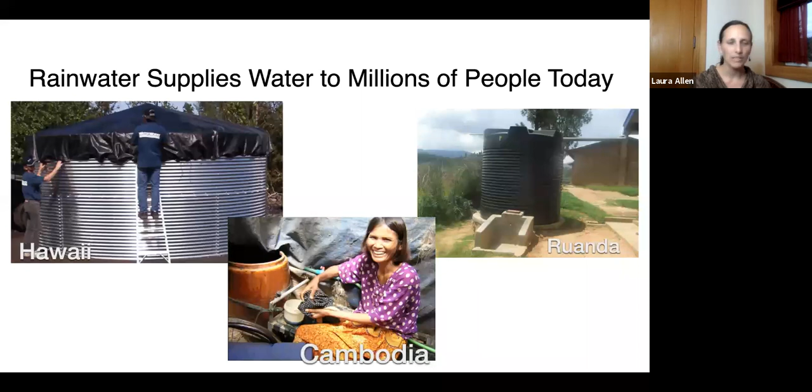Texas has a lot of rainwater-only water supply. San Juan Islands, there's these kind of spatterings of communities around the United States. But also, in many places, the rain is completely ignored and shunted away.

So tonight we're going to talk about benefits of rainwater, which is going to be incorporated into everything we discuss. It's an obvious way to replace water coming from your municipal supply with an on-site water source, basically this free, clean water falling from the sky that we can harvest and put to beneficial use. We're also going to talk about stormwater, which is a huge problem in our cities and towns and world, and how we can turn that from a problem into a solution.

We'll talk about rain gardens, which are ways to collect rain in the ground. We'll talk about catchment, so tanks, ways we can store the rain, and talk about these different components and design considerations.

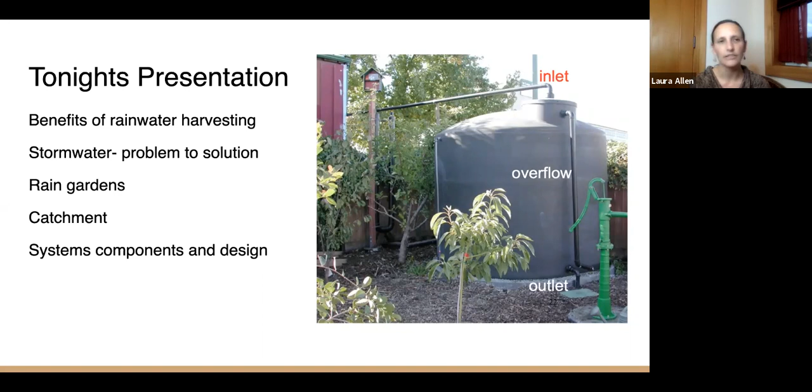Before we get started on rainwater, I just want to contextualize it as one tool in the toolbox of how to have more on-site water and rely less on our municipal supplies.

So we have rainwater and stormwater, two water supplies we'll talk about tonight. There's also greywater, which is water you've already used in your home. There was a webinar on this just a little while ago, and it's recorded, so you can watch that if you missed it. Greywater comes from showers, sinks, and washing machines.

Black water is combined wastewater from a home, and it's typically not used at the residential scale, though it is in some places and on a larger scale. And then some places have what's called mechanical water.

So rainwater is a piece of this, and it's a really important water source, especially in our wet climate. Even though we're in a Mediterranean climate, which means we have a big dry season, we get a lot of rain when it does rain, which is a lot more than some of our neighbors to the south, like California.

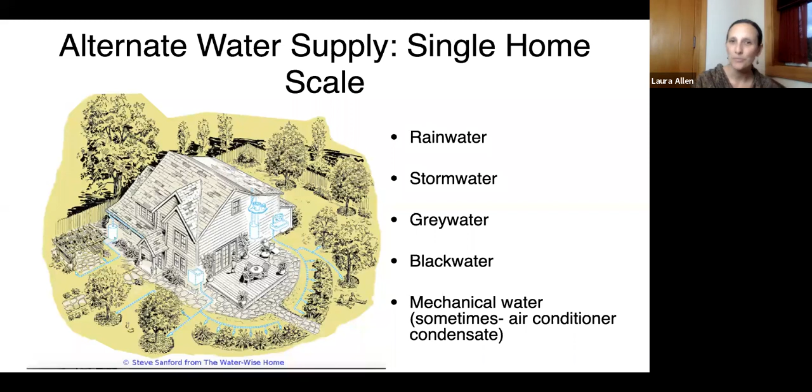When it rains, some people think, oh no, it's raining, I've got to get my umbrella or my raincoat, and it's kind of this annoying thing. Other people are super excited about it.

Historically, rain operated really differently in our communities and cities, before we developed our cities—places that have lots of buildings, roofs, and roads, a lot of hardscape. Hardscape is built substances that rainwater doesn't soak into.

Before that was developed, our landscapes infiltrated water—a lot of water infiltrated into the ground. So there wasn't a lot of runoff, much less flooding and localized flooding conditions. And the water that ran off was pretty clean because it was cleaned through this healthy landscape.

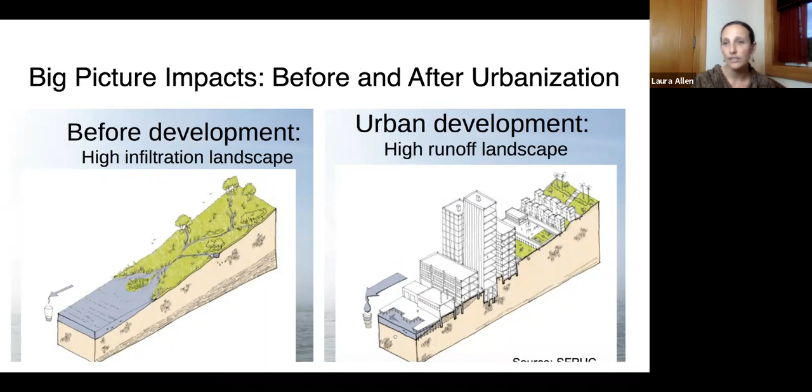But after urban development, the way we built our cities, rainwater flushes over our cities and picks up a lot of pollution, and a lot of it leaves our landscapes. This is causing a lot of challenges and problems for our environment, as well as for life in our cities.

So it causes a lot of problems for all the living things in our streams. It also causes problems for the structure of our streams, lots of erosion, cutting of banks, flooding. By building our cities, we've caused a lot of problems downstream that us living in our homes might not even be aware of, that all that rain running off our driveway is causing these problems.

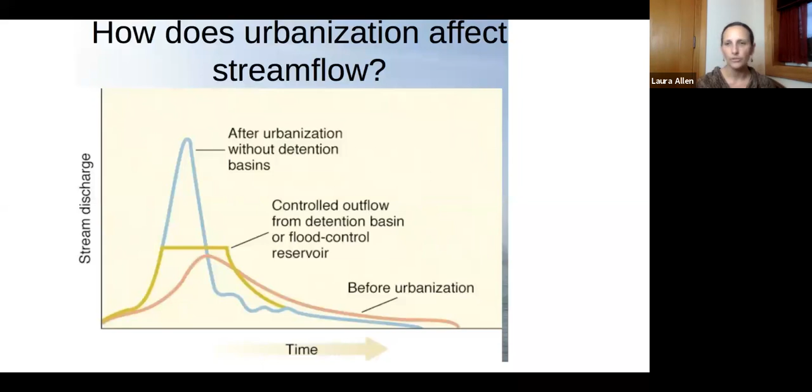So just some terminology before we get started. Rainwater is kind of obvious, it's the rain that comes down. When we're talking about using rainwater, we mean it's landed on the roof and we've collected it before it got to the ground. That's a rainwater catchment system.

Stormwater, this is also rainwater. When it rains, the rain comes down, but once it lands on the surface of the ground, we now call it stormwater. It's regulated a little differently, and what you could find in it is different because now it's washing over our streets and has a different quality than rainwater does. So when I talk about rainwater, I might mean any water coming from the sky, but when we talk about a rainwater system, it's collecting it before it hits the ground. When we talk about stormwater, we're talking about managing that rainwater after it's gotten onto the ground. I hope that makes sense.

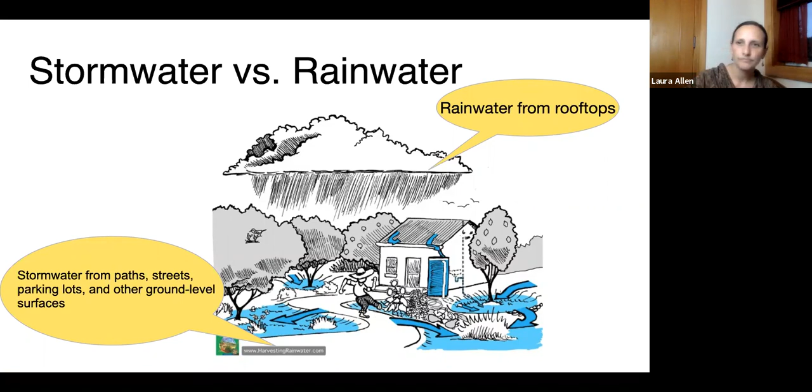Stormwater is a source of a lot of pollution. Our cities have lots of things on them that are unhealthy for the environment. There's dog poop, herbicides, pesticides, brake dust, oil slicks, trash on the surface. When it rains, all that gets flushed and washed away, goes straight down our storm drains, and usually is directly discharged into a waterway. A creek connects to rivers and bays and oceans. That's how a lot of pollution gets out into the environment, through our stormwater system, the system we've designed to get rainwater away from our homes and streets so we don't have flooding.

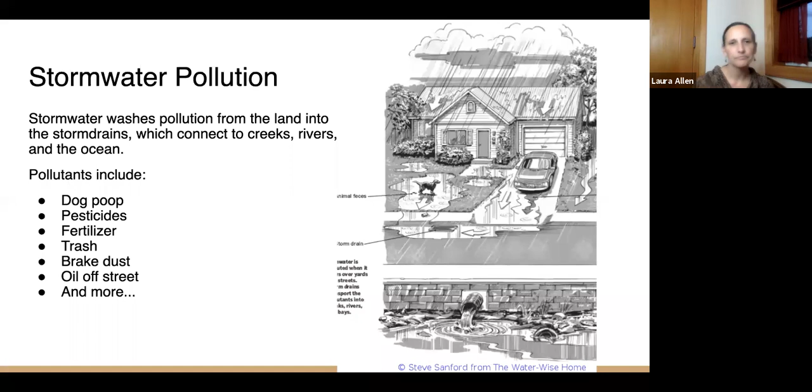We don't want this rainwater to become this big problem. There's a lot of things we can do, and some of them are very, very simple.

Just thinking about what kind of materials do we want to use around our home. If we want a path, do we have to have a cement path? Could it be a wood chip path instead? Wood chips will soak the water down into the ground and the water won't run off, whereas a cement path, the water can't soak into it and it will run off of that landscape.

Having a lot of plants, deep-rooted plants, a lot of native plants, those are really good at opening soil and increasing infiltration in your landscape. So you could have this beautiful, lovely landscape that's also soaking up rainwater and preventing pollution downstream. That's something really simple that doesn't take a lot of shifts, if you're at a decision-making point about what to put in your landscape. If your landscape's already constructed, then we need to make some changes to it.

I'm going to start by talking about passive water harvesting, or in-ground harvesting, where we take the rainwater as it comes off our roofs and streets and turns into stormwater, and we try to stop it from leaving our properties and soak it into the ground.

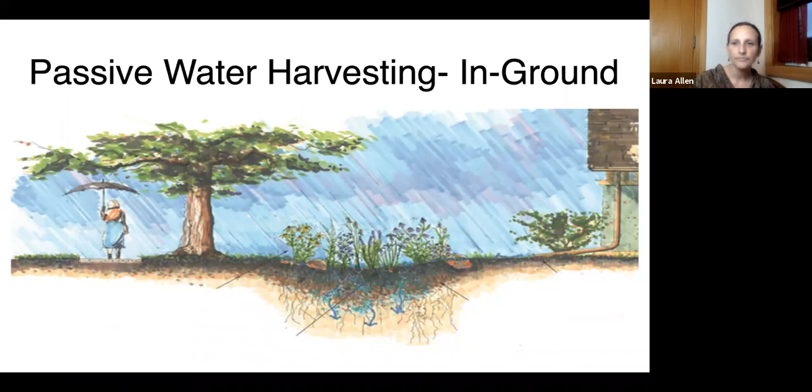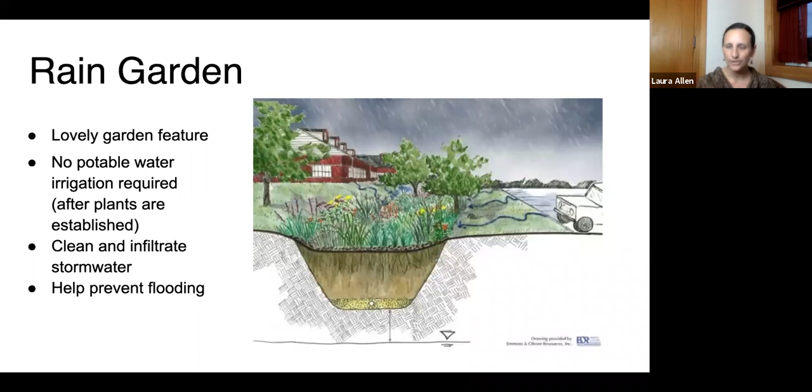A rain garden is a very lovely garden feature. You could think of it as just something beautiful to put in your landscape. Rain gardens also don't require potable water irrigation, so once established, you have a nice landscaped area you never have to water. They also clean and infiltrate stormwater and help prevent flooding, giving multi-benefits in our landscape—beautiful landscapes that also prevent flooding and clean water, benefiting our yard as well as our community's watersheds.

A bit more about the rain garden: how it works is you're directing water into it from something that can't soak in water—usually from your roof, your downspouts, where a lot of water comes off. It could also be from your driveway, or other hardscape, which you direct into your rain garden.

There are edges called berms to keep the water in, so you're creating this bowl and designing it so the water will pool up. You don't want it to pool too long, because then mosquitoes could breed, so it pools for about 24 hours and then soaks away. This gives a nice big space to collect a bunch of water at a time and slowly soak it down over a day or maybe two. That's basically what a rain garden is.

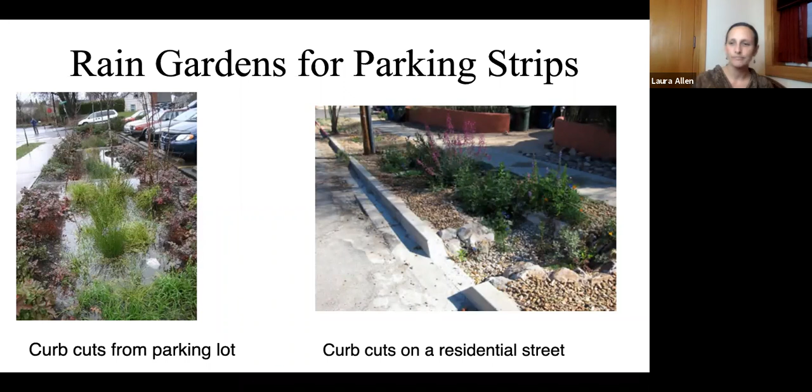The last thing I want to mention about stormwater is that it can be collected, cleaned, and then used for a non-potable, non-drinking need, like toilet flushing. These are usually only done at the commercial scale. There are examples all over the country where commercial or larger institutional sized buildings are collecting stormwater, filtering it, cleaning it, and using it for non-potable use.

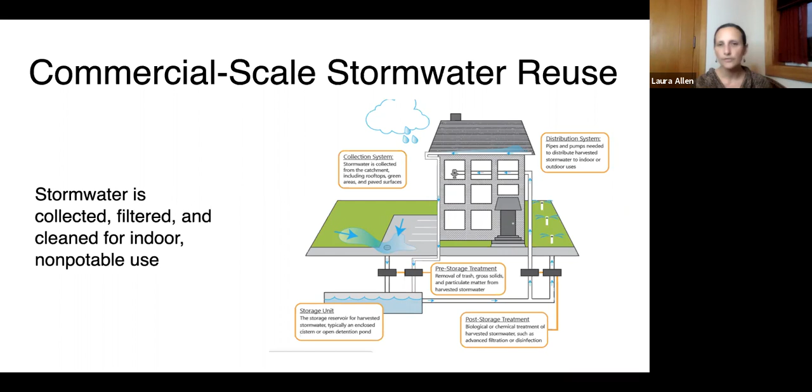So now I'm going to shift to talk about storing the water and using it for later. The thing about rainwater is there is a lot of it. If you have a roof like a house, you're going to be able to collect a bunch of water, but it's not always when you need it, especially if we're using it for irrigation, which is the easiest way to use rainwater—just store it and then simply irrigate the landscape, because you don't need any extra filtration or disinfection. It's pretty simple.

But the timing doesn't always match up, especially in our Mediterranean climates where we get all of our rain one part of the year and all of our irrigation need is a different part of the year. So we have to be managing that.

Another thing to keep in mind is when we are using rainwater in our homes, we can use these different approaches together. We can integrate how we are harvesting the water. So maybe from one of your gutters, your downspouts, you might send that water into a rain garden, like the picture on the front, and just flow and sink that water and have this lovely garden feature.

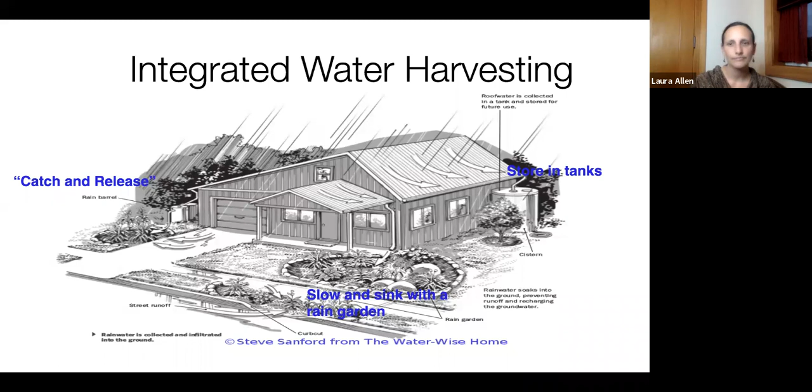Here's a picture showing different ways you can collect rainwater. You can see in just 1 inch of rain, you can collect about 600 gallons, so that really adds up quick. The simple rain barrel in the front, that's a single rain barrel. That's a small thing that usually any site has room for, and the cost is very low. It's very easy to put in, and it's a great reminder of how much water we have, how much potential we have, even though a rain barrel isn't really tapping into the scale of potential we have on our roofs.

A lot of times you can connect rain barrels together.

So on the lower part, under that deck in the back, you can see there are 8 rain barrels connected together—that's 400 gallons of storage. You can make rain barrels add up to a lot of storage, and they're really nice to use in dead spaces, like under decks or narrow areas behind buildings that are usually unused. They fit into these unused spaces and can connect together to increase capacity.

Then we have the tanks, the cylindrical circular tanks. You can see in the picture, toward the left side, there's a 3,000 gallon tank. Those are usually placed near the building—they're big, but not too big. In this home, they have an even bigger 10,000 gallon tank located away from the building. I'll talk about how you get water from the house into these various collection systems, but you can put the larger collection farther away so you don't have the visual impact of it.

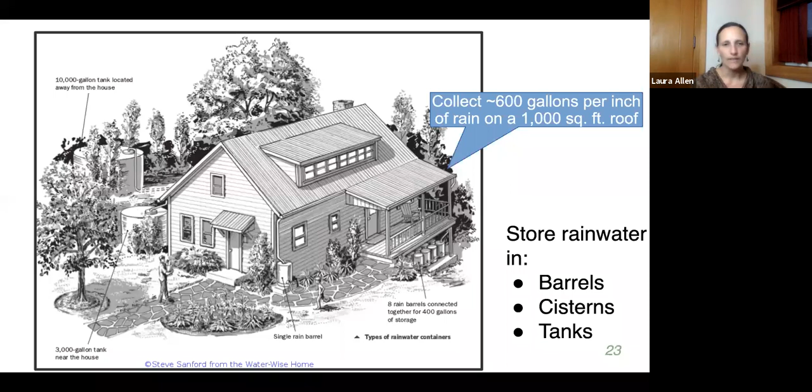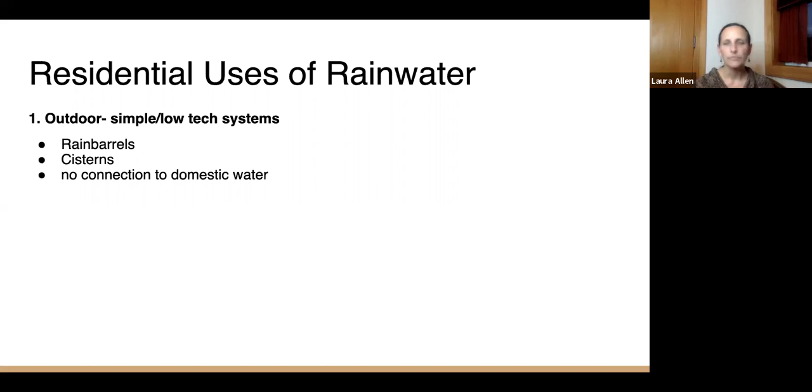We typically use residential rainwater in 3 main ways. The first is using the water outdoors in a really simple system—having a rain barrel, cistern, or tank (we use those words interchangeably) with no connection to the domestic water supply, just a separate system. We use a hose or a simple irrigation system to send the water outside. This is the most common way to use rainwater in our area.

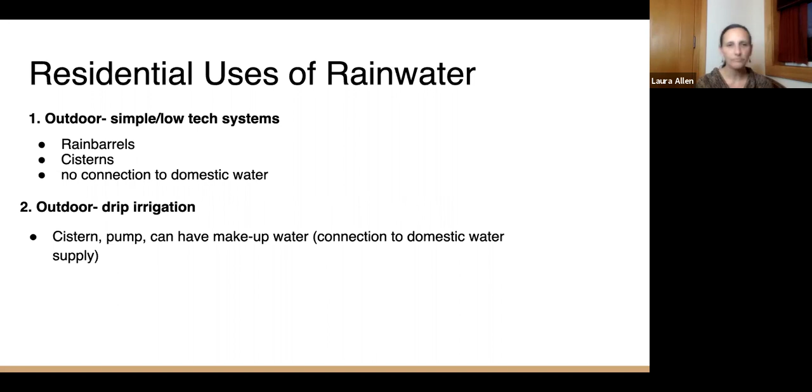The second way is also outdoors, but sending it into a drip irrigation system. You'll have a tank or cistern, and you might have a pump or not—there are zero-pressure components you can use. You can have a drip system that runs off the very low pressure a rainwater system has, or use a pump. In a more sophisticated system, you can connect it into the rest of your water supply in ways that protect the drinking water, so if you run out of rainwater, the system can switch over and finish the irrigation with the domestic water supply. That's another way. The third is sending the rainwater back inside the home, and these methods increase in complexity.

Inside our homes we have non-potable uses of water, like toilets and laundry. No one's drinking that water, so it could be lower quality, and rainwater can easily supply these—it's relatively clean with just a little filtration. It can technically or functionally go into these fixtures and appliances and be used instead. With extra filtration and disinfection, rainwater can be brought up to drinking water quality and supply the whole house's water use. The permits for that are a different story, but technically, yes, it can definitely do that. Whether you can get permission is a different question, and that really depends on the state and local jurisdiction.

Currently, I wouldn't say it's easy, but it's much easier to get an indoor system approved for non-potable uses than for potable use, barring examples like Hawaii, where there are no other water options. In places where there are other water options, it's pretty easy to use rainwater for toilet flushing or laundry, though the system will of course cost more. So most people just keep the water outside.

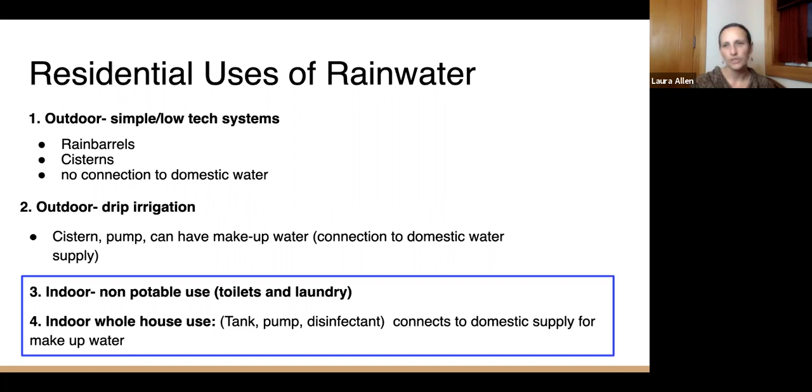I'm going to show you a few calculations you might want to do—consider this optional. If you have a house in an urban or suburban area, you'll be able to fill any size tank you feel comfortable putting in your yard. If you live in a rural place or have a bigger lot, you might want to calculate this to make sure you can fill it, especially if you're thinking about a 10,000 gallon tank, or if you're collecting off a very small roof, like a garden shed, or doing a project in a community garden where you don't have a building, just a shade structure or something.

I'm going to show you how to do this, but just know if you want to do rainwater and you're in a kind of urban or suburban home, you don't need to do this. You'll see why, because the answer is almost always yes, you can fill your tank, no problem.

So the first thing you do, step one, is find your roof's catchment area. The catchment area is the same as the footprint of your house. The slope or pitch of your roof doesn't impact this at all. You just need to know how wide the house is and how long it is, then multiply those two numbers together.

So in this example, this house is 80 feet long and 30 feet wide, so it's 2,400 square feet. Of course, your house might not be an exact rectangle. You might have little offshoots, so you might have to add a couple of calculations together to get your total area. Or if you're just doing a portion of your home, you can find the area of that section where the gutters go to one place.

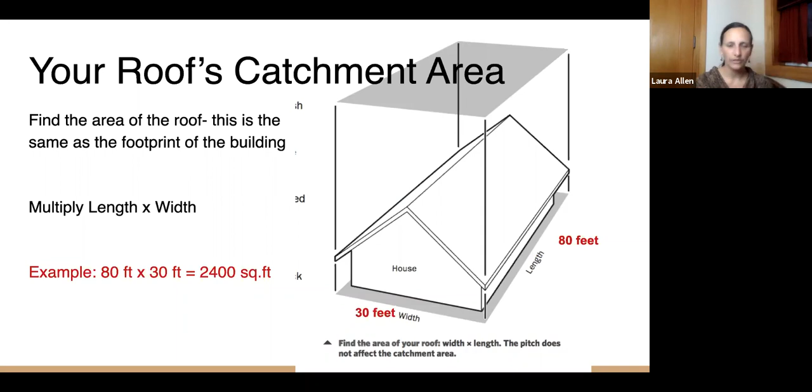So this is the area of the roof, the catchment surface, in this example. The next thing we need to do is calculate the potential rainwater potential. We start with our catchment area, and then we multiply it by rainfall.

We usually use average rainfall, but depending on your situation, you might want to use a dry year. If you were building a house and your only water supply was rainwater, you would not want to plan for average, because we know that many years we don't get the average rainfall. You'd want to plan for your worst case scenario drought year to size your system. But for us who have other water sources, we just use average rainfall because it tends to work.

So we have catchment area times rainfall, and then there's a coefficient that converts inches. We put our rainfall in inches, our catchment area in square feet, and we want to get the answer in gallons. It's just a conversion coefficient that does that. We multiply those three together, and we get gallons per year.

So in this example, a 2,400 square foot home times 45 inches—I used the average in Eugene where I live—times the coefficient, and I got 60,480 gallons per year. That is a lot of water. Just to note on that coefficient number, 0.56, there's a built-in efficiency of 90%, just assuming that not every drop is going to get into your system. Some's going to blow away, some's going to splash out, so there is a bit of an efficiency loss there.

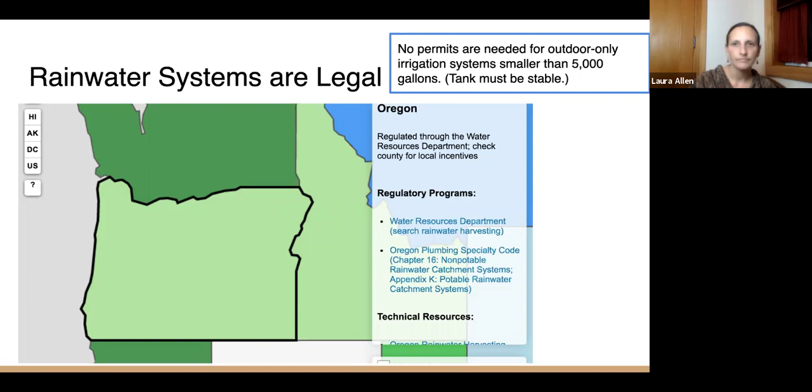So we'll start with the smallest system, the rain barrel. It's about 50 gallons. These barrels you can purchase new, but you can also often get them repurposed, meaning they were used for a food grade application. They use these barrels to transport all sorts of food grade material like syrup and flavorings and all sorts of things, olives and olive oil and lots of stuff. People get them, wash them, and then sell them.

You can sometimes find them on Craigslist. Sometimes stores will sell them, like irrigation or farm supply stores will get them as a repurposed barrel supply and sell them. Also the beverage industry uses them a lot, so it's great if you want to do a rain barrel. I would really encourage you to get a recycled or reused food grade barrel, so you're not making new plastic when you don't need to.

So here we have our barrel. You're bringing the water in from your downspout. It's screened. Whenever you have standing water, mosquitoes can breed, so you want to make sure that any opening, any place mosquitoes can get in, like this big open barrel, is screened. You want to consider general safety, like this barrel - you don't want a kid to grab it and pull it toward them. That could tip it over if it was partially full, and that could be dangerous.

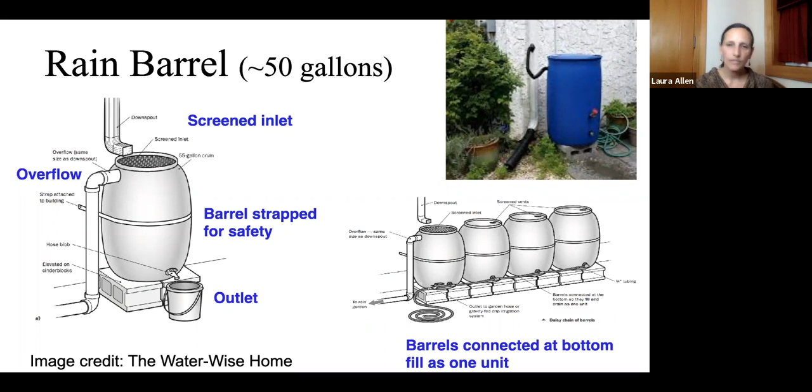There is a system called Blue Barrel Systems. This is actually a company, and they use these blue barrels, which are very common in the beverage industry, so they're probably the most common type of repurposed barrel you can get. What they've done is created kits to give people all the materials to take this kind of standard barrel, which they can get in many parts of the country, and convert it into a rainwater system. I really like that, being able to support people to get their local reused product and then turn it into a rainwater system.

So here's an example of that, and they use this diverter where they're diverting out of the gutter. I'll show it again in another picture. It's pretty cool because you just tap into the gutter, the water flows in and fills your barrels, and when it's full, no more water comes in. So you don't have to have a separate overflow - this kind of functions as the inlet as well as the overflow.

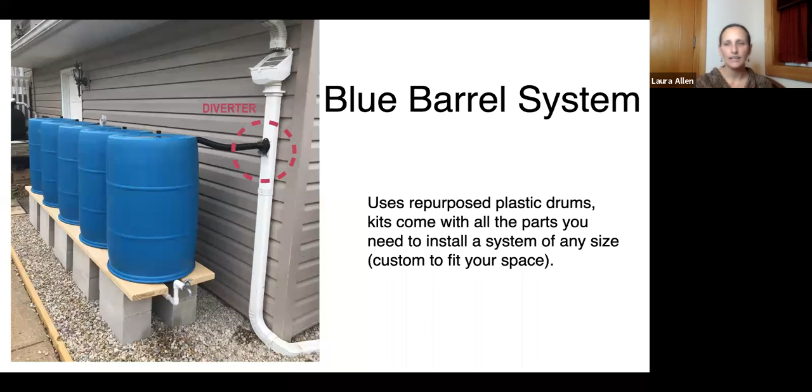Here's one, if you're interested in that, just to give you an example. There's several companies that make the same concept.

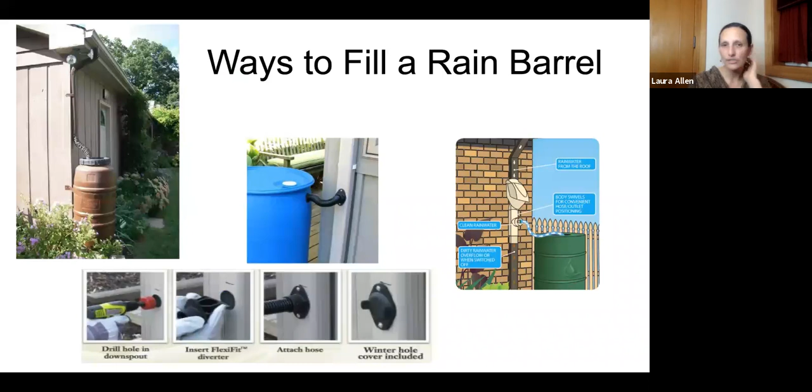Just a reminder that you're always screening openings. Different types of systems have different ways to get in. I'll go back to the Blue Barrel system. This one doesn't have openings, it just has screened vents, so it wouldn't need big mosquito screens. But if you're running your rainwater right into the top and you've created an opening, or maybe it didn't have a lid, you really need to make sure that's screened.

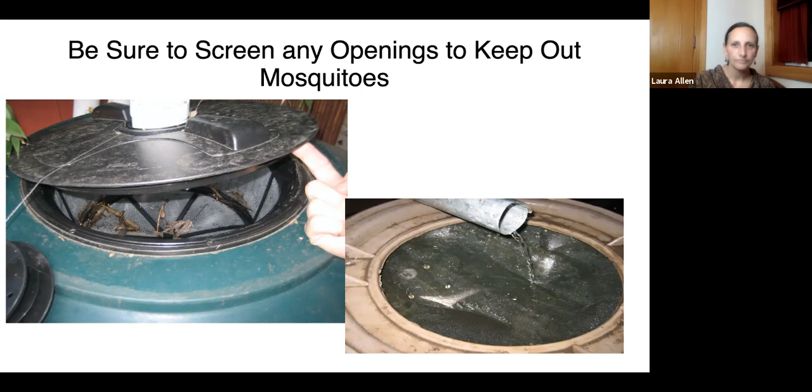I want to touch on how much irrigation. When you're using a water source for irrigation, you need to know how much to water your plants, and that can help with your sizing. Just to show you how little water is in 50 gallons: if you have 100 square feet of landscape, and it's a lawn, it needs about 90 gallons per week in the summer. So that's more than your rain barrel could even provide — it couldn't water that patch of lawn for a week.

If you went to a vegetable garden instead, that would take about 70 gallons. Still more than a rain barrel, but getting closer. But if you were irrigating low water use plants, like drought tolerant native plants, they only need about 15 gallons to look really nice. Of course, once they're established, you could maybe not irrigate them, but to make them look more lush and lovely, you can irrigate them a little bit.

Now you can see, if you're doing a water efficient landscape, your rainwater can go so much farther. This is another good way for people to start shifting their concept of what is a beautiful landscape in my community — maybe shifting away from something very resource intensive, like a lawn, to something that might bring extra benefits and use a lot less water, like native plantings.

This also drives people to think, well, a rain barrel is a great place to start, but maybe I want something bigger because I've got a lot more water and I want to use it. That's where you get into your catchment systems. It's similar — you have a tank, it's like a barrel, just bigger. There's a few other pieces because now there's more water, and you're storing the water for longer since it's not going to run out in less than a week.

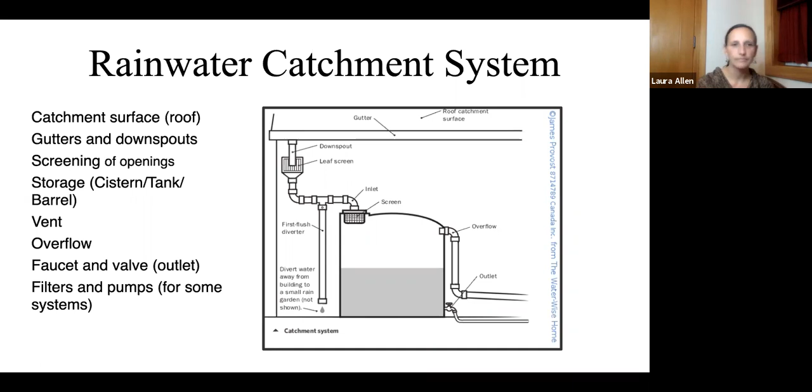So we have our tank. Sometimes you have a screen on top, sometimes not, depending on how it's set up and how big the opening is. They have an overflow and an outlet, and maybe filters and pumps if it's going to be an indoor system, or if it's going into a large drip irrigation system. Now we'll look at all this in more detail.

The tank, that green plastic tank, is the most common and most affordable. Some people think it's ugly; I actually don't, I think it looks just fine. I've recently learned that it's a chalkboard - you can draw on it with chalk, which kids love, and it washes away when it rains. You can also paint it, or put a screen like chicken wire around it and grow plants up it to cover it. So you can really get it to fit your aesthetic.

It comes from a couple hundred gallons up to thousands and thousands of gallons in size. You can also connect big tanks, like 3,000 gallon tanks, together, the same way you can connect rain barrels together, which is something people do rather than dealing with moving an 8 to 10,000 gallon tank. Sometimes it's easier to have a couple of 4,000 gallon tanks connected together.

Going down, there's a 10,000 gallon tank - these are metal tanks with a liner inside, often used in more rural situations or places where it's the only water supply. The upper picture shows some 205 gallon tanks connected together; these are smaller and narrower. In this home, in this side area, they don't have space - a big tank would block the windows, the view, and the path - but they do have room for several of these 200 gallon tanks connected together. So that's something else you can do to work with the space you have available.

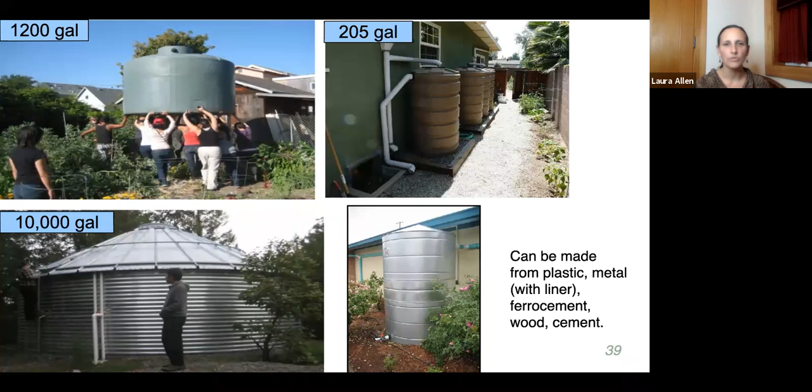With this system, the downspout goes into a pipe that goes down under the ground. You can travel underground, keeping it out of the way, and then come back up into your tank. This works by gravity as long as the opening of your tank is lower than where you're tapping into the downspout - there has to be a bit of a height difference to account for friction through the pipe. With just a couple inches of difference, the water flows by gravity up into your tank, and you don't have to have a pipe in the air over your head.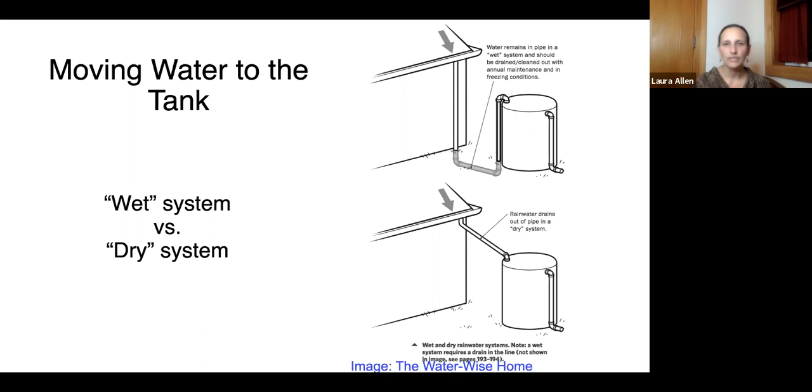It looks really nice. You can have a lot more flexibility in where you situate that tank. If you're in a freezing climate, the standing water in that pipe in the winter might be a problem if you don't bury it deep enough. So people often put a drain down somewhere in the system where you can empty it if you're in a place that has really hard freezes, so you can empty that pipe in the winter and then close it again.

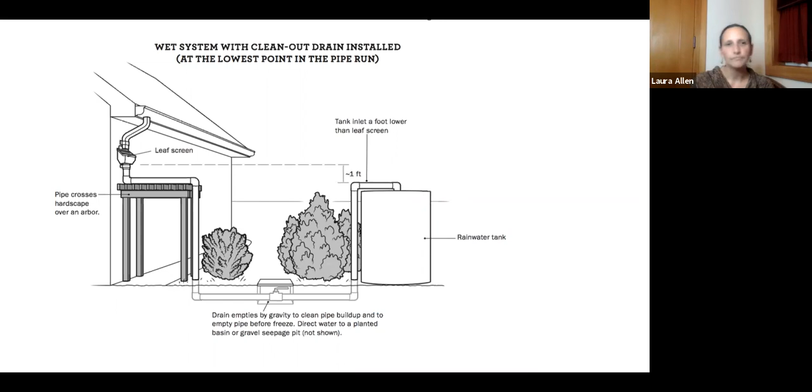So I'm going to talk a minute about how to keep the rainwater clean. There is the beginning of the very first screen, which is the leaf eater—it has different names, I think that's a brand name—but basically it's this little piece that sits right under the downspout. When the water flows onto it, the leaves get stuck, the water flows down, and you do have to clean that off every so often.

There is the first flush diverter, which I already talked about, that basically shunts away the first rainwater. You might have the screens on the tank. And then the other thing is the color of your tank.

Your tank should always be dark colored so algae doesn't grow. Sometimes people use IBC totes—those clear white square totes that have a metal frame around them. They're used for transporting food grade materials so they can be repurposed for rain collection. They definitely can work, but because of the color, they need to be protected, so they would need some type of painting or covering to keep the quality of the water good. Just be aware of that.

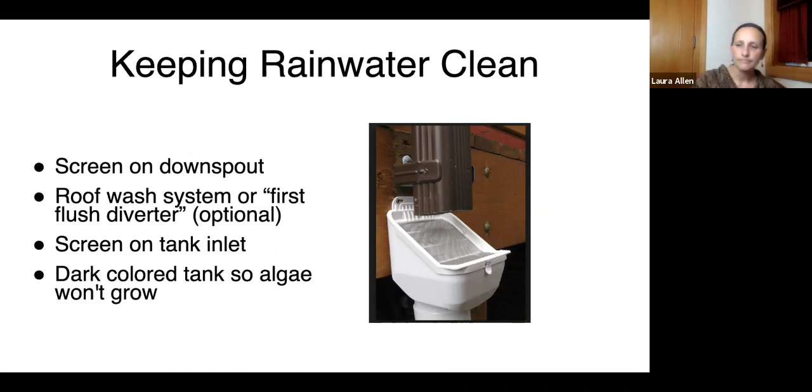Here's another picture of that leaf screen. You can see what it looks like, getting from the gutter into the leaf screen.

I know some people are really interested in rain chains. They're really beautiful, variations on the standard gutter. Any type of moving water from your gutters down to the ground can work with this—it could be your standard gutter, it could be the rain chain, it could be the scupper, if I'm pronouncing that right—just different ways people like to move water that can all work.

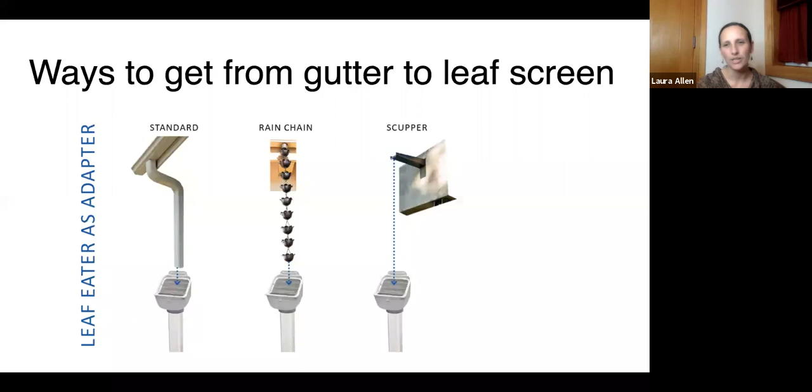First flush diverter—not all systems have it, so I want to show you a couple of options. If you live in a climate where it rains really frequently, you definitely don't need it because the roof isn't building up a lot of debris. But if you live in a place where it does build up, we also have ash and things from fires—we don't want that getting into our rain tank. It's important to have, and it's not too hard. So I'd definitely recommend it, especially with forest fires and other debris that get onto our roofs that we don't want going into our tank.

So there's two common locations for it. In the middle image, you can see it's right up against the house, so the rain will fall into that big tube strip. There's a ball you can't see that's inside, that floats and plugs the top, and then the clean water goes into the tank. You can also put it against the tank—if you don't want it against your house, you can move it over to be right by the tank. That's an option too.

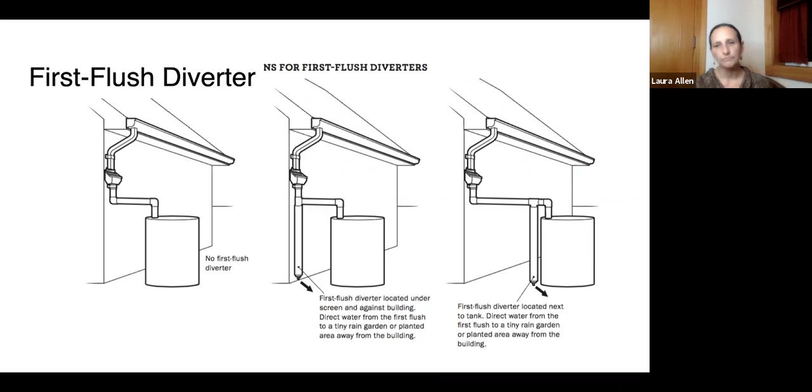So now you have the rain, you have your inlet, and it's clean. You kept the tank screened, you kept the color dark so you don't have algae growing, and now you want to use the water. The easiest way is to just put a garden hose on it, or create a little place to fit a watering can—those totally work. You can also set up a gravity fed drip system. For it to be worth your while, you'd want maybe 1,000 or more gallons of storage, though upper hundreds could also be worth it. You'd want to figure out for yourself what feels right—investing in the system or hand watering—but you can definitely connect it into a gravity drip system.

It doesn't work with all drip components, so make sure you're doing the research and getting the right components that will work for this low pressure situation. It's not actually just gravity, because you have the pressure of the water higher in the tank, but it's a lot lower pressure than your garden spigot. When I use my rainwater tank, it takes a lot longer to flow out because it's just lower pressure.

So having it into a gravity drip system can be nice, because then you don't have to stand there with the hose and water - it can take a long time. If you have a big garden and a big tank, you can just turn your timer on for longer and get the same amount of water out of it.

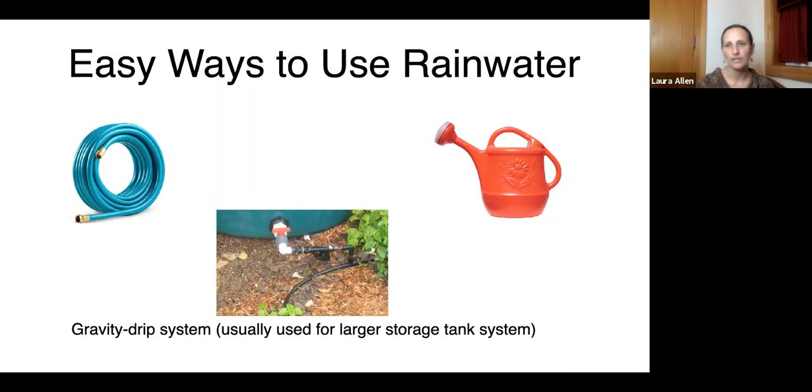So if you do have the bigger system and want to invest in the gravity drip, there are several options. In the resources I'll give you, you can read these in detail - you don't have to remember all of this, but this is a picture. I wrote a book that has this in it, called The Water-Wise Home. It takes you through how to transform your home to be more water wise, including using rainwater, so some of these pictures are from that.

So you can see that your gravity system can irrigate bushes, it could irrigate a vegetable bed, it could irrigate berries. There's a lot of different ways to spread out that rainwater.

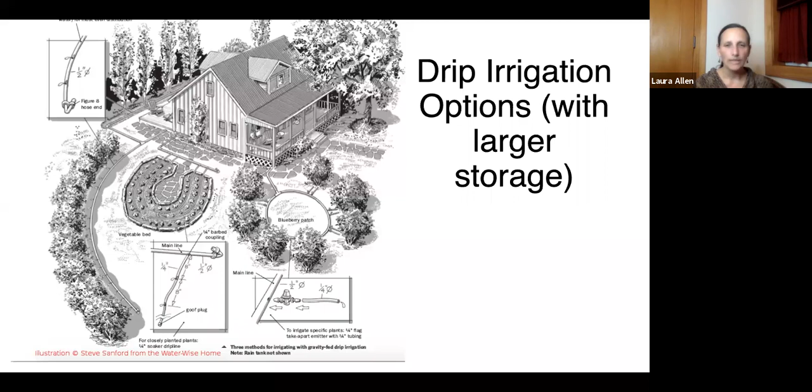And then you have your overflow. So even with the big tank, it's going to fill up and the extra water has to go somewhere. Make sure your overflow is the same size as your inlet. You don't want to restrict the flow and cause a backup, which could cause problems up on your roof or wherever you've tapped in, because the water isn't able to flow through your system quickly enough. So always size your overflow the same as your inlet.

Your overflow should go somewhere suitable. Having a rain garden is a great place, or a vegetated area somewhere that can soak up the rain. If you're able to have it go to a rain garden with a tree planted, then the tree can shade your rain tank and help keep the water cooler. And if the summer is really hot, there are ways you can increase the benefits of this resource of your system.

You might want to have a screen or what's called a backwater valve on your overflow. The reason you might want to is that sometimes in dry places in particular, rodents can be really attracted to water, and they might want to climb up your system and then die in your tank. That would be really gross and you wouldn't want that. So you can kind of suss out how you feel about taking that risk or not, but it's pretty easy to just screen your overflow or put in a backwater valve. It's like a little flapper that easily opens, but if you push against it in the opposite direction, it closes and won't move. So that's a way to protect your tank from anything that wants to crawl up through that overflow.

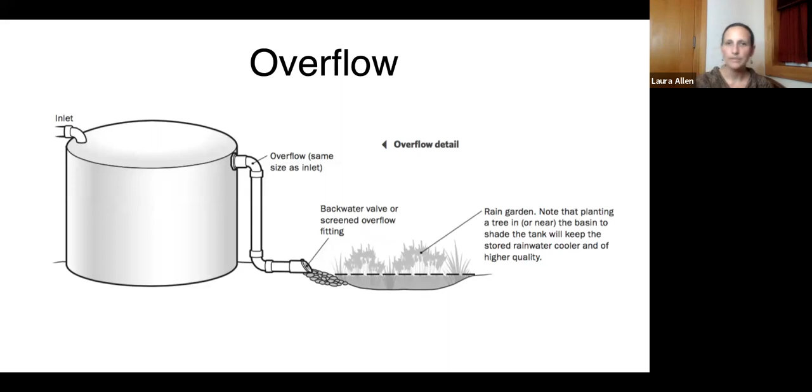And then just to end with some of the indoor rainwater systems - one thing that's really attractive about using rainwater indoors is you save a lot more water. So if you're using rainwater for irrigation, basically what we're trying to do is save the winter rain for use in the summer, but we don't have enough room to actually store all the winter rain, so we just store a portion of it.

With an indoor system, we need to flush our toilets all year long if we have flush toilets, and if we can do it for our laundry or washing our clothes all year long, then we can be using our rainwater throughout the rainy season. So we're drawing down our tank a little bit and then it's filling again, and we draw it down, it fills again. So a smaller tank can actually save more water because you're drawing down and refilling over and over all winter long.

So if you're able to - of course these systems cost a lot more, because not only do you have the tank and all that part, but now you have to have a pump, and you have to have filtration and disinfection, and then you have permitting fees too.

But if you're able to, it's a way to save even more water and to make your home more resilient, because you have this extra water supply that can go into your home and be used rather than just having it outside for irrigation.

One thing I didn't mention is for emergency preparedness, having a rainwater system is a big benefit. If you don't draw it all the way down, you're going to have hundreds of gallons depending on the size, so a lot of water for storage in an emergency situation. You can just have a backpacking drinking water filter and use that water if the supply was shut off. That's another benefit that a lot of catchment system owners think about — they see this big tank and think, that's going to help me if there is an emergency.

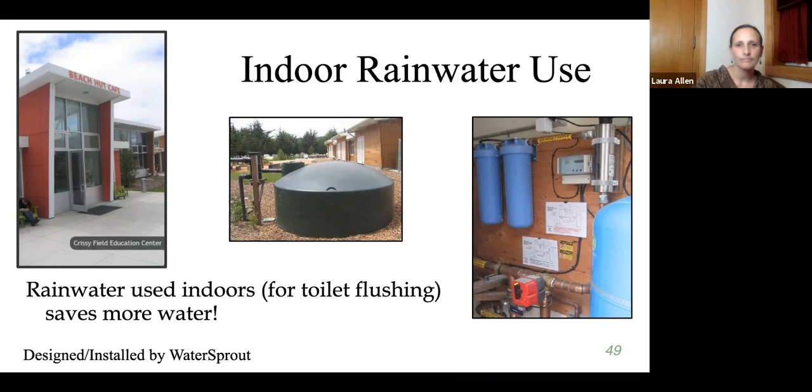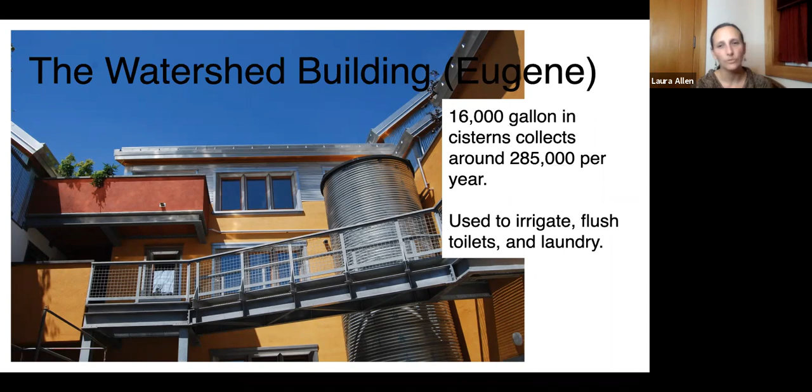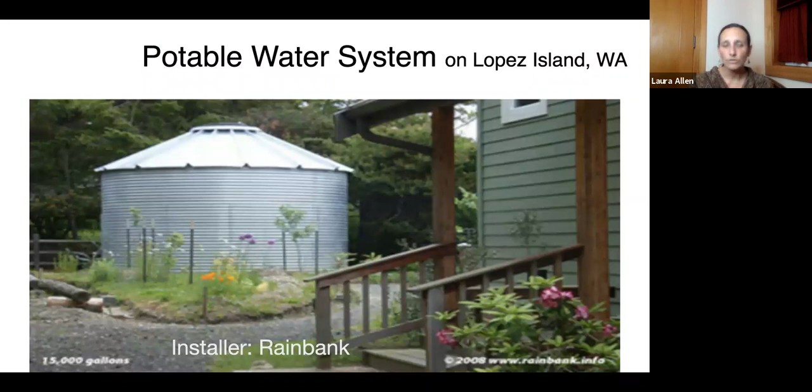Here's a residential scale, potable system on Lopez Island. Again, you can see it's big because this is the only water supply for this home.

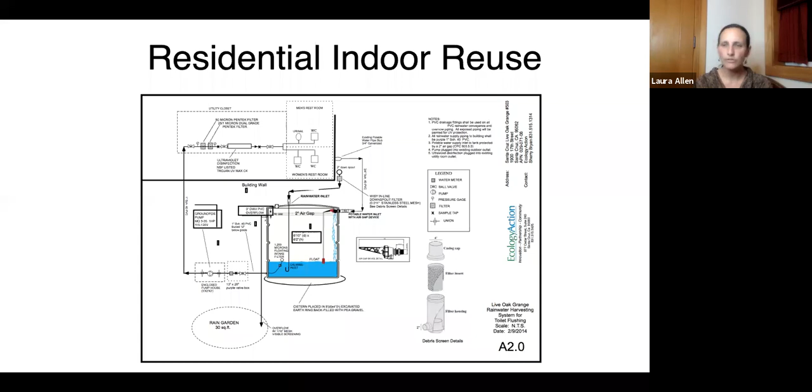Just to end on some bigger scale examples — there are tanks that are buried. A lot of commercial projects with very large, 10, 20, 30,000 gallon cisterns will bury them so they fit into these more dense, tight lots that have a lot of water need — under parking lots, under pathways, under walking areas. There are a lot of options, so if you plan it during construction, these systems can really be integrated in.

This example is in Santa Monica. At one of their library branches, they were redoing the library, and the whole city is trying to be what's called net zero — so if they have a new water demand, they try to offset it somewhere else, either by conservation or reuse of rainwater or other water sources. This is an example of what they did, and you can see some of the components of the screening and treatment.

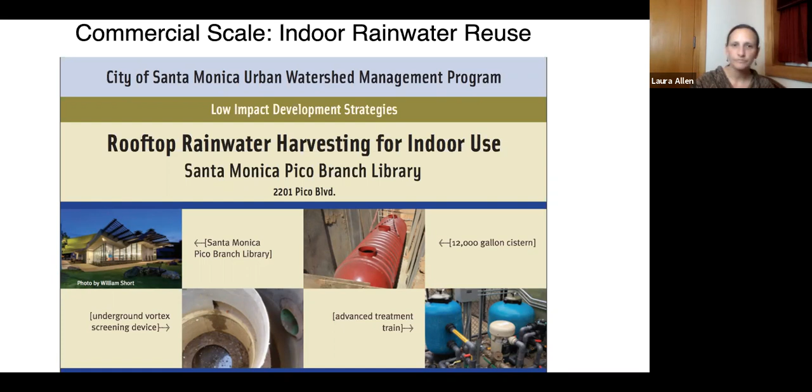So, typical costs. The outdoor systems are the lowest cost. If you can get a repurposed barrel, sometimes you can call around to restaurants which will on occasion have one or two — you can get them free sometimes. It might be harder because a lot of people are interested, but it's still possible. Find a place that does produce a lot of barrels, and if you get lucky, you can get one for free. Then you just have to spend maybe 10, 20, or 30 dollars on the little components, and you can have a system set up. Maybe you don't have that much time, or your community doesn't have any barrels and you have to buy one. Rain barrels typically are quite low cost, and they're often given away for free in different areas. So if it's a do-it-yourself project, you can really lower the cost.

If you want to purchase a tank for more storage and have it installed, you can think about the cost for just the tank as 50 cents per gallon up to $1 per gallon. The lowest cost tanks are the green plastic cylinder type, and those are more like 50 to 60 cents per gallon.

The ones that are more narrow with ribbed plastic in different colors, you can get one to maybe match your house. Those ones are more like $1 per gallon, but it really varies a lot, so I don't want to quote you on any numbers, but I just want to give you the range.

And then if you hire somebody, there's going to be labor. The advantage of hiring someone is that they can source all the materials and really make sure you think about everything. So if you're able to, I definitely encourage you to work with a professional.

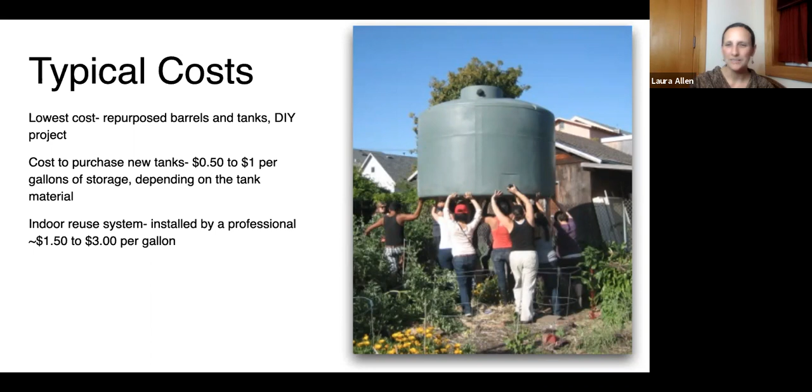So I'm going to end with some design considerations and then some resources. As you're thinking about implementing this in your home, I encourage you to first think about what you're going to use the water for.

If you really want to irrigate native plants, you can put in a rain garden with no plastic, nothing other than moving the land and buying the plants. There's very little material involved. You just have to get the water into your rain garden and have an overflow, but it's very natural, very low impact, and affordable if you do the digging yourself.

If you hire someone, of course, that's a lot of labor, so there is cost to that. If you want to help the environment and prevent stormwater pollution, a rain garden is the way to go. If you want to irrigate your vegetable garden or fruit trees, that's when you need to store the water, so you would look at rain barrels or a rain tank.

After you've identified that, you want to think about where you can locate the system. Look at your gutters, look at where your downspouts come down, and which downspout is connected to what section of your home. Sometimes homes have little porches with small sections of roof, so one downspout might only be catching half of a porch — that would not be a good downspout to focus on. Pay attention to what the downspout is capturing, how much of your roof, and where you might be able to direct that water, either into a rain garden or into a tank.

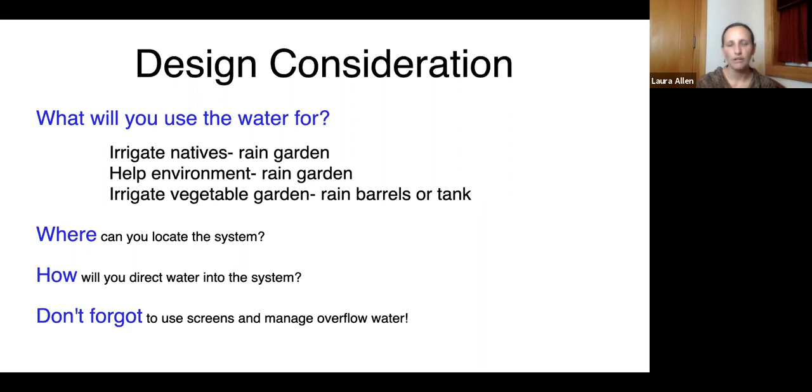He has another rainwater book, and he's a great resource. He's mostly focused on in-ground, rain garden type harvesting, but he covers all the different types of rainwater harvesting. There's also watertoolkit.org, another resource focused on California, but it has good info about all these different rainwater systems. And there's ARCSA, the American Rainwater Catchment Systems Association.

ARCSA is a professional association that has a resource guide to help people find professionals. Professionals can get ARCSA certified and then get listed on their website, so you could find someone trained in rainwater who's certified through ARCSA, knowing they've had proper training to put in your system. There are people who could do a great job without going through ARCSA, so I don't want you to think that's the only place to look for installers, but it's a good place to start if you're having trouble finding people locally.

If you want to do it yourself for buying materials, Blue Barrel Systems sells kits that can be adapted to any of those blue barrels, and they help people find barrels in their area. They're for a smaller rain barrel type system. If you're wanting a tank, rainharvest.com is an online source for that. There are also local stores, so find your local irrigation store. They often, if they're more progressive, might sell materials, and the Soil and Water Conservation District could also give you some pointers depending on where you live.